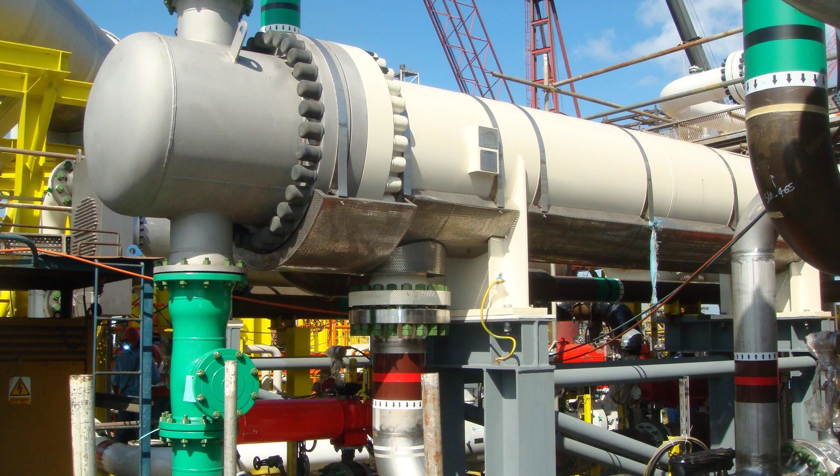This is not a dangerous job because things go wrong. It's dangerous because nothing is allowed to go wrong. Inside an active oil refinery, furnaces burn at 800 degrees, hydrocrackers operate at pressures that could split steel, and flammable vapor can reach ignition concentration in seconds. Every shift, every valve turn is governed by systems designed to prevent catastrophe. So what happens when those systems fail, even once?

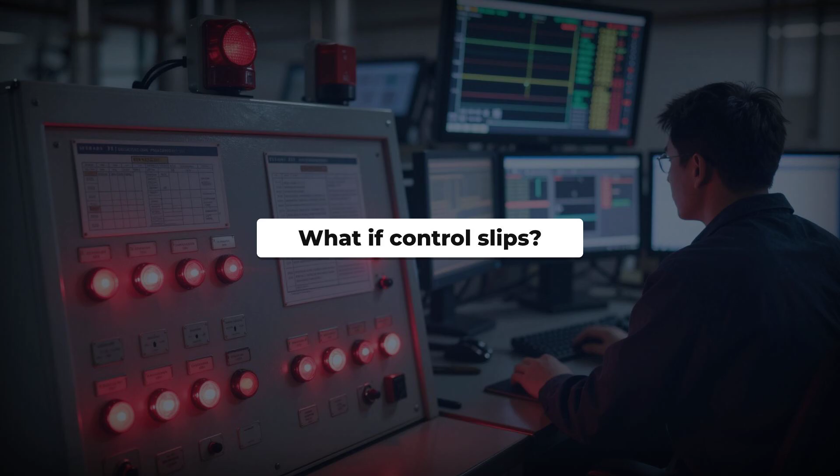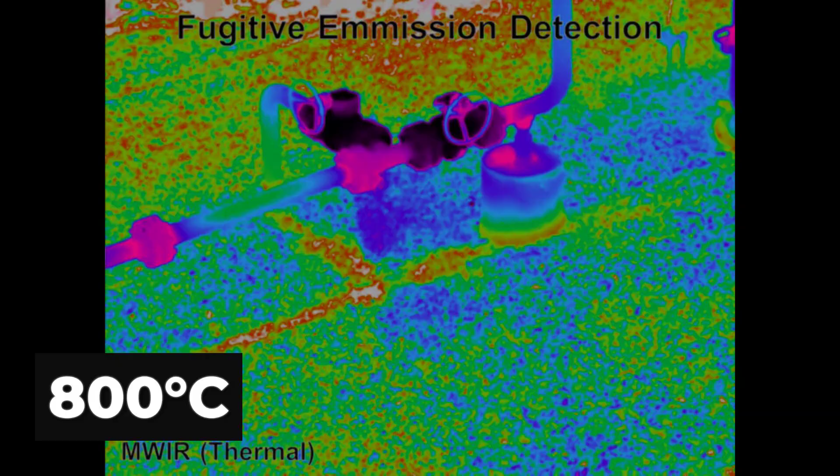Heat, pressure, and inventory define the physical reality inside an oil refinery. Fired heaters push process streams to temperatures between 400 and 800 degrees Celsius. In catalytic reformers, the steel shell glows faintly as hydrocarbon vapors circulate at over 500 degrees Celsius.

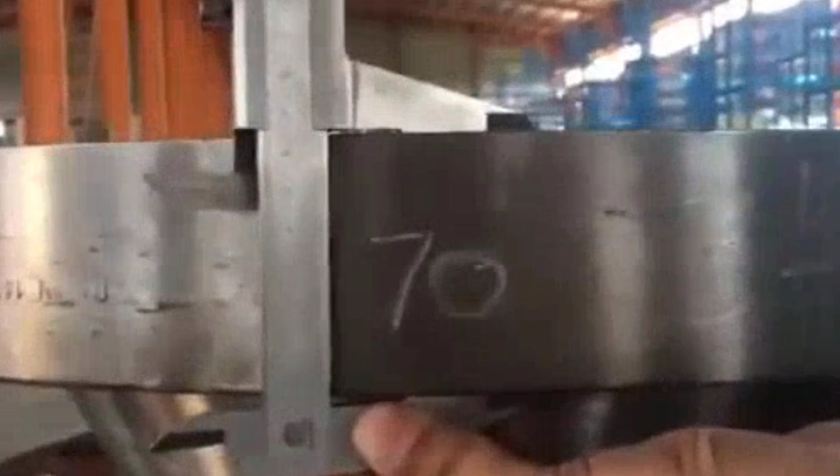Hydrocracker reactors run at up to 2,500 pounds per square inch, enough to rupture a vessel in milliseconds if containment fails. Every line, vessel, and flange holds a calculated volume of flammable hydrocarbons under these conditions. Even in so-called ambient zones, radiant heat keeps walkways at 60 to 80 degrees Celsius.

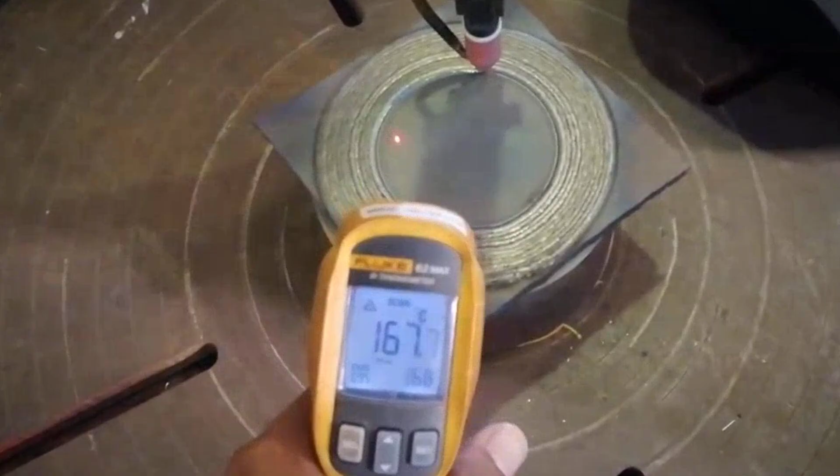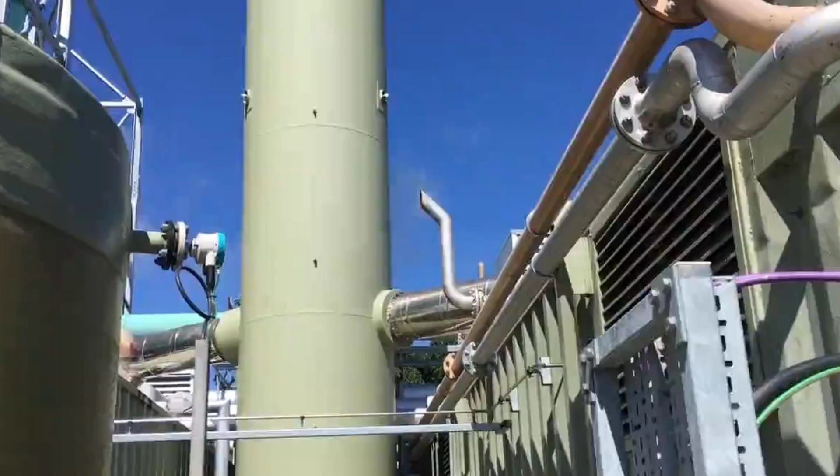The energy stored in these units is not theoretical. A single distillation tower can contain thousands of barrels of volatile product. Pressure surges, even brief ones, can force vapor through the smallest gasket flaw, forming an invisible cloud within seconds.

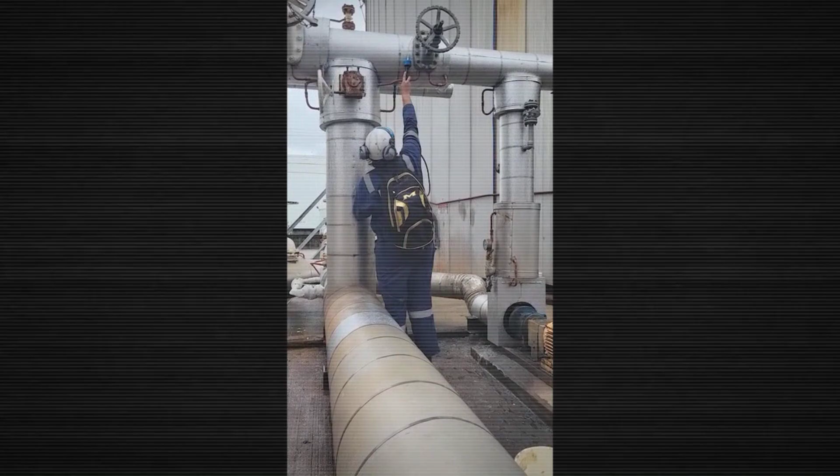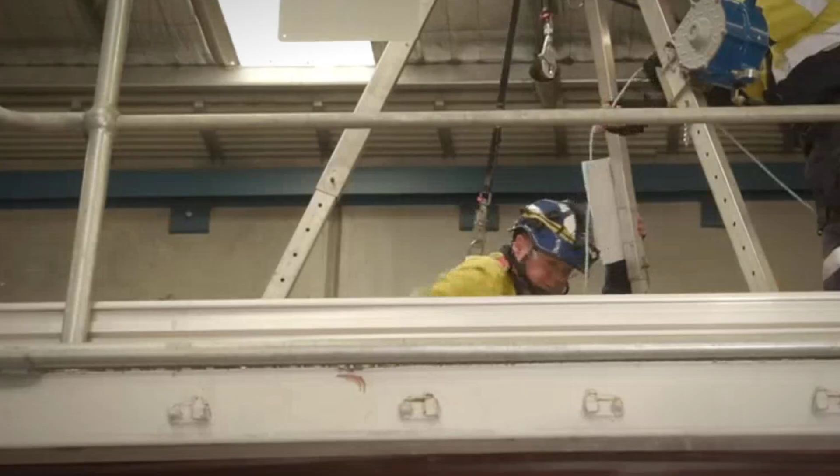In the overheads of a tower, vapor concentrations can reach ignition limits, methane at 5 to 15% by volume, propane at just over 2%. The density of these gases means they pool low, seeking out drains and trenches, and waiting for a spark. Continuous operation is not just a business decision, it is a safety strategy.

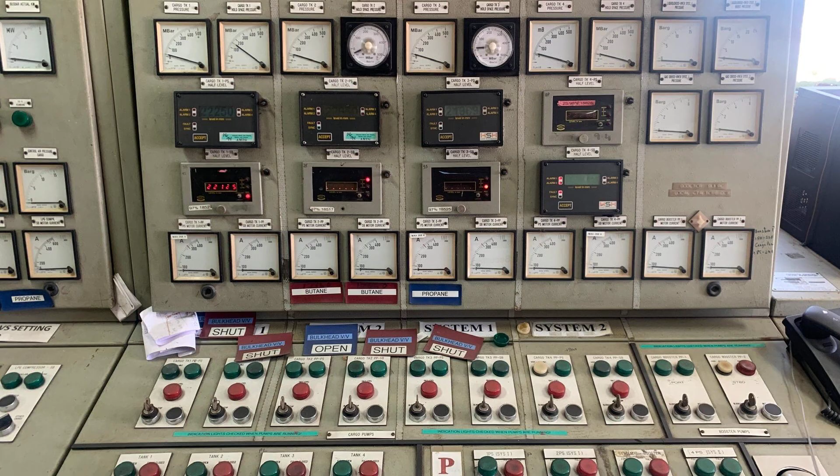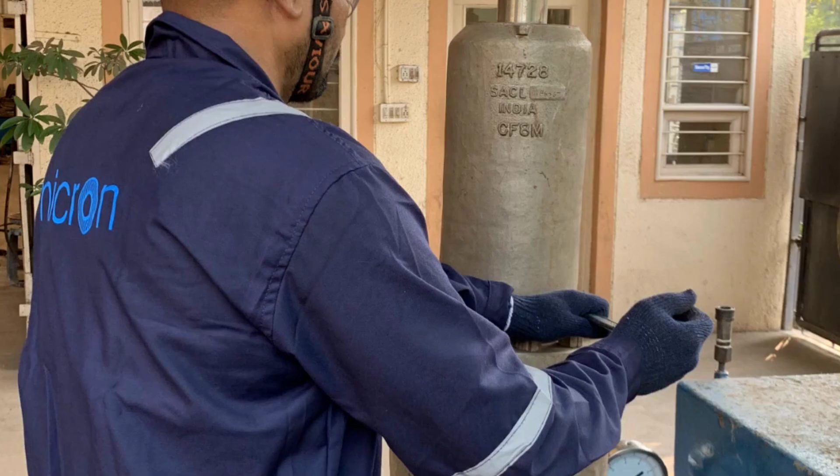Shutdowns and startups introduce unpredictable transients, temperature spikes, pressure fluctuations, and unstable flows. These are the moments when systems are most vulnerable, when a routine action can become the first step in a chain reaction. Every control, every barrier, is designed to keep the process steady. In this environment, a moment's deviation from steady state is not a minor error. It is a potential loss of control, with consequences measured in seconds and in lives.

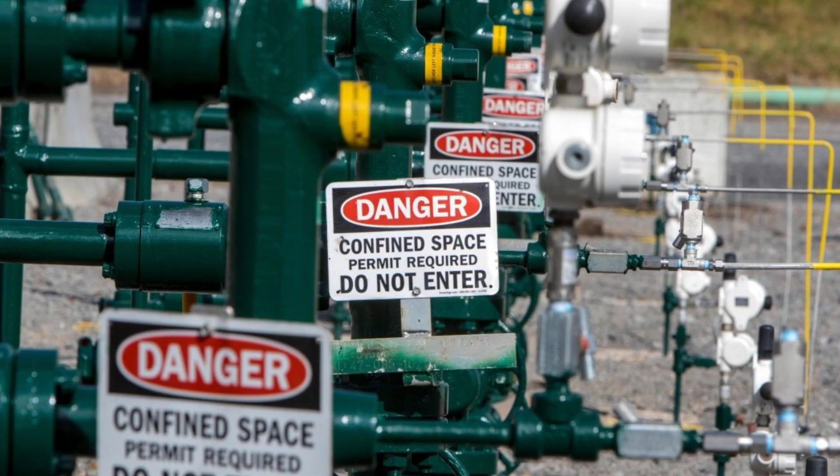Control inside an oil refinery is not left to chance. Every high-risk task, welding, valve isolation, confined space entry, begins with a permit to work. The superintendent reviews a digital dashboard showing open permits, each tagged to a specific unit, shift, and work team.

The process starts with a formal request. A supervisor details the job, location, and hazards. The permit system pulls live data from the maintenance scheduler and piping diagrams, flagging potential conflicts. No permit is issued until hazards are logged. Gas tests confirm safe levels, and every isolation point is marked on the digital piping and instrumentation diagram.

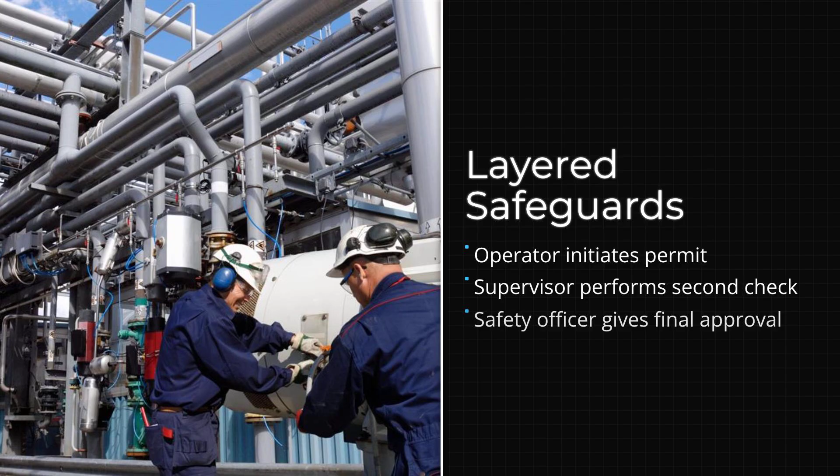Authorization moves in layers. The area operator signs first, then the shift supervisor, and finally, a safety officer. For hot work, gas detectors must read below 10% of the lower explosive limit. Only then does the system allow the work to proceed.

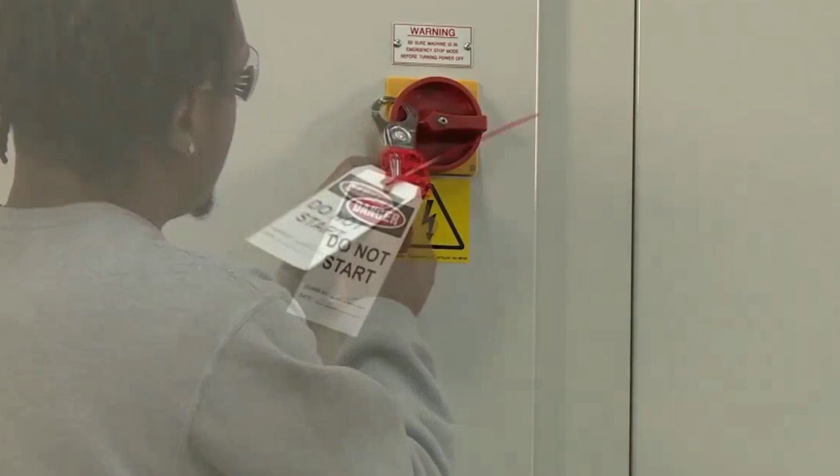Lockout and tagout devices are applied, red hasps, danger tags, and personal locks from each authorized worker. A third-party verifier checks every step, confirming energy sources are isolated and alarms are functional. No single person can bypass these controls.

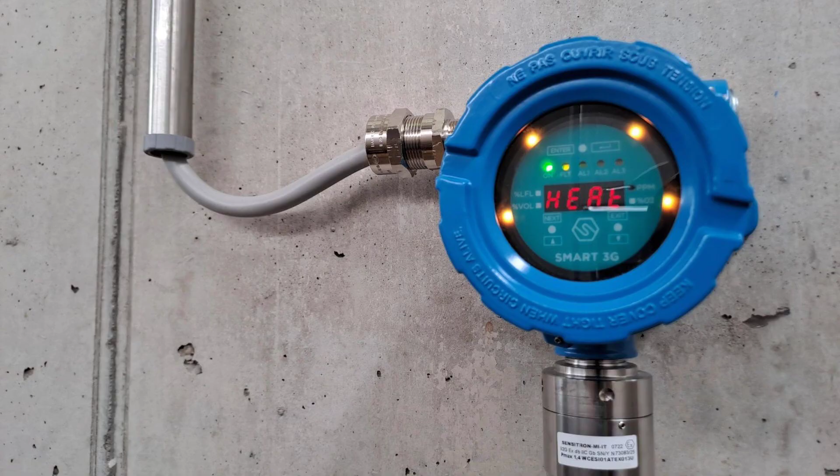Fixed gas detectors form a silent perimeter. Infrared sensors monitor for methane and propane, with alarm set points at 20 to 50% of the lower explosive limit. Signals flow to the control room, where logic solvers wait for a vote. 2 out of 3 detectors must agree before an emergency shutdown triggers. All actions are logged, time-stamped, and archived for audit.

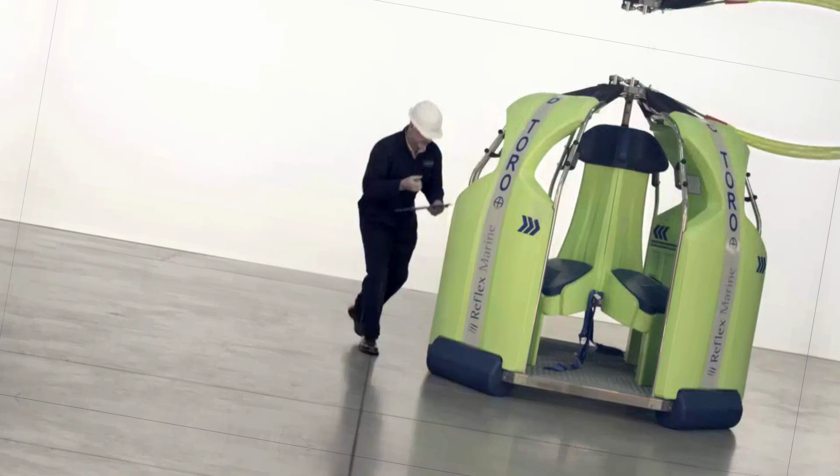The superintendent knows, in this environment, safety is built on traceability and redundancy, and strict adherence to procedure. The system does not forgive improvisation. It demands discipline at every level.

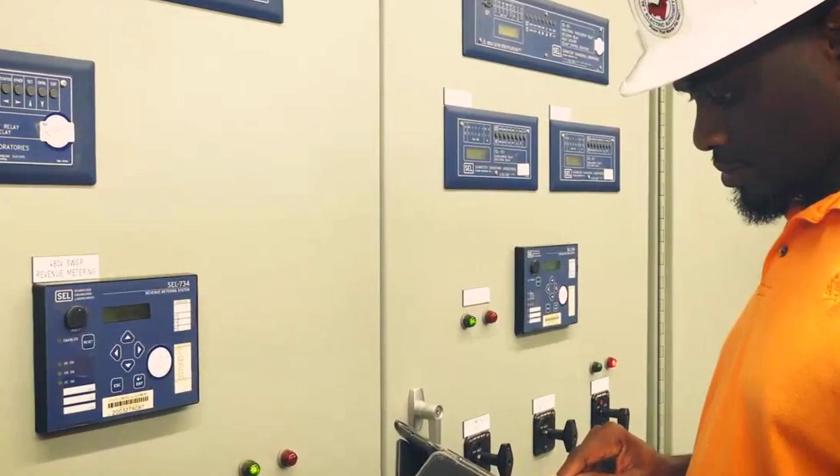A superintendent stands at the heart of the refinery's control structure, not as a lone decision-maker, but as the conductor of a tightly orchestrated process. Every action begins with a checklist, printed or digital, detailing the precise sequence for each task. Nothing is left to memory.

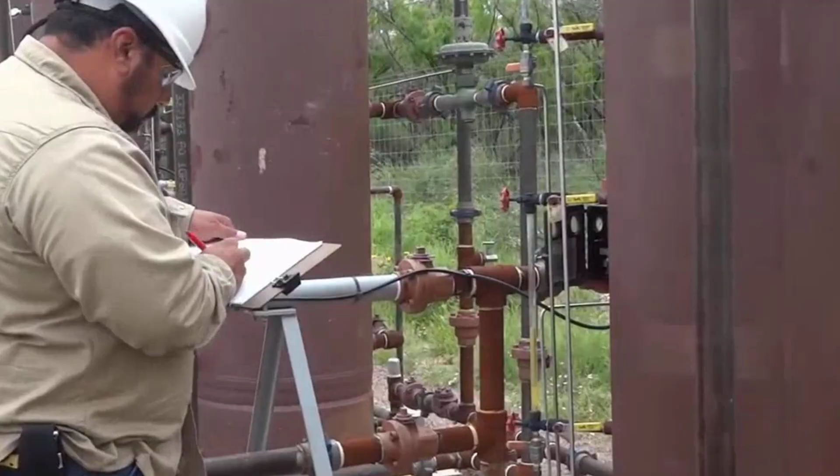Before a single valve is touched, the operator and a verifier walk the route together, cross-referencing each isolation point against the marked P&ID. The valve handle is tagged, locked, and double-checked. Only when both sign off does the process advance.

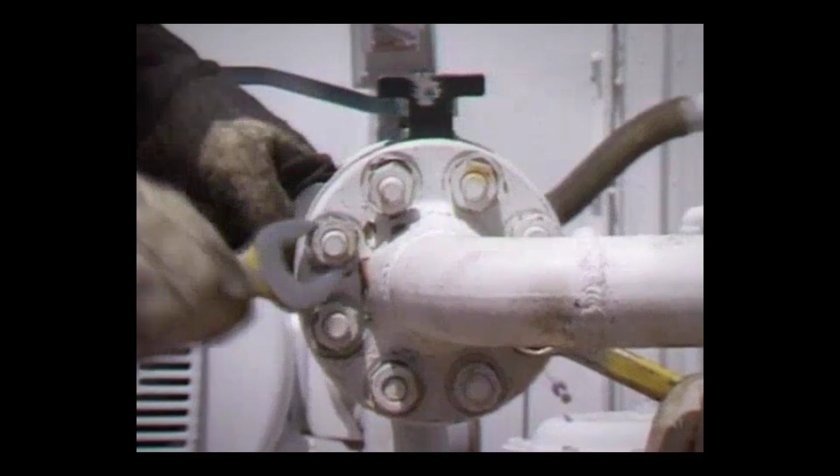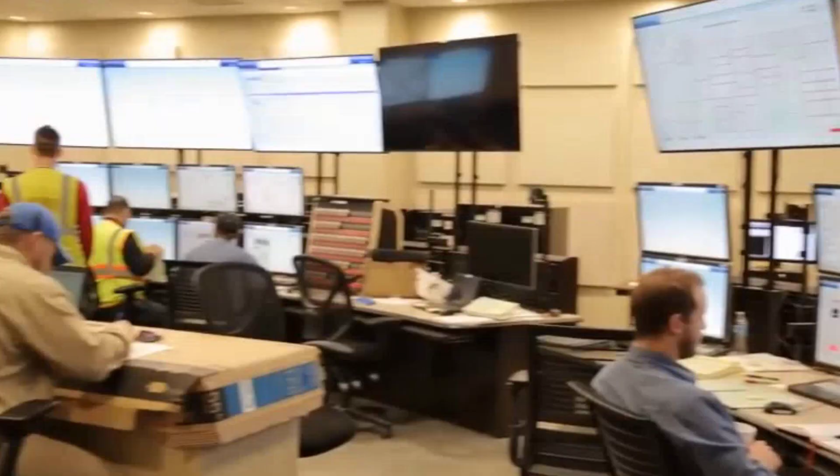Sidney Dekker calls this adaptive buffering. Humans act as the final shield against system drift. Operators do not improvise. They execute, verify, and document. If a step is unclear, the process stops. Questions are escalated, never bypassed.

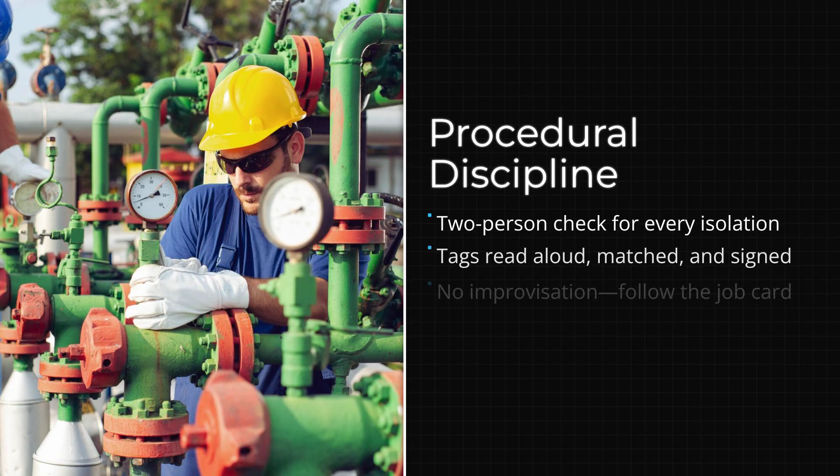Two-person verification is standard for critical isolations, with each worker reading aloud the tag number, confirming position, and logging the result. The superintendent observes not to intervene, but to ensure that the discipline of the process is respected.

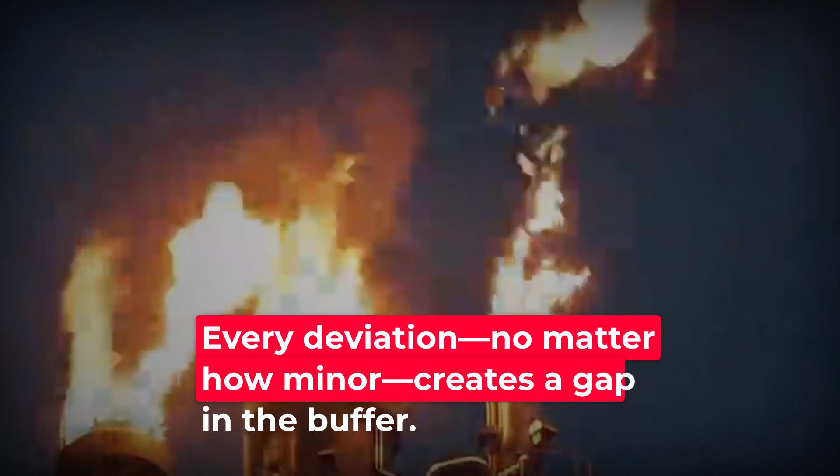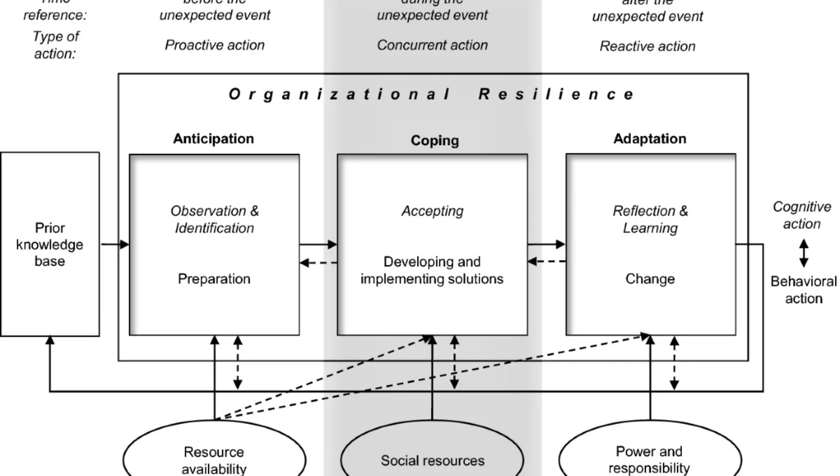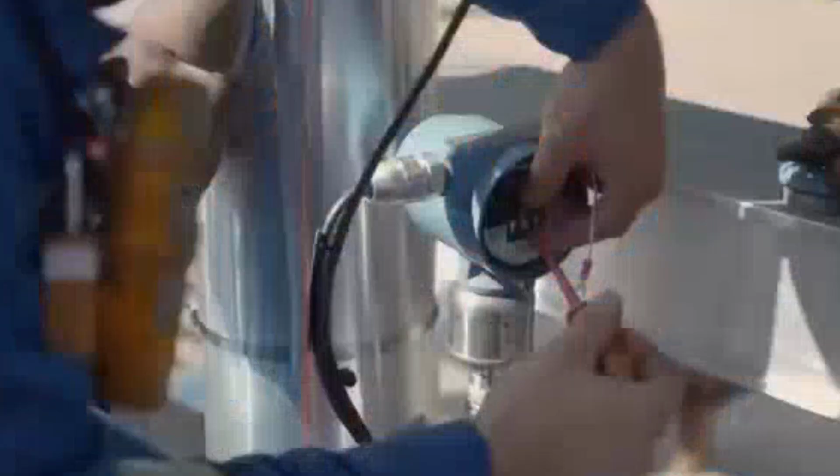In the refinery, discipline is not a suggestion. It is the only thing separating routine maintenance from catastrophe. The human layer is not there to innovate, but to absorb uncertainty through strict adherence. Precision is not a virtue, it is a requirement. The system expects it, and so does every worker who steps inside the fence.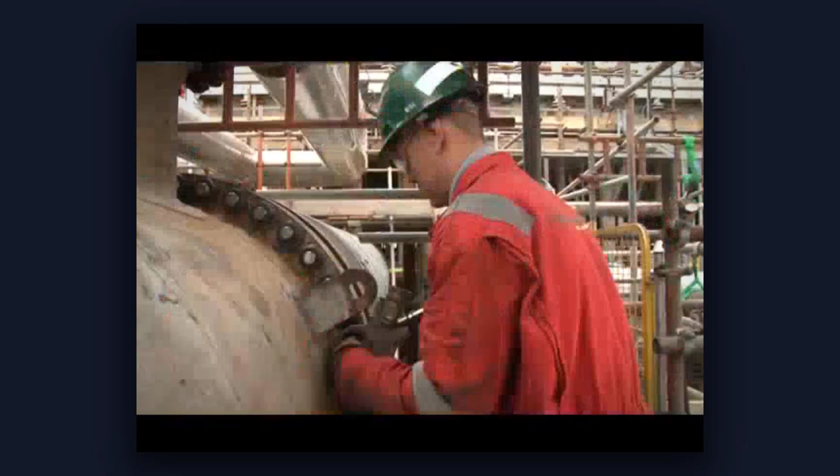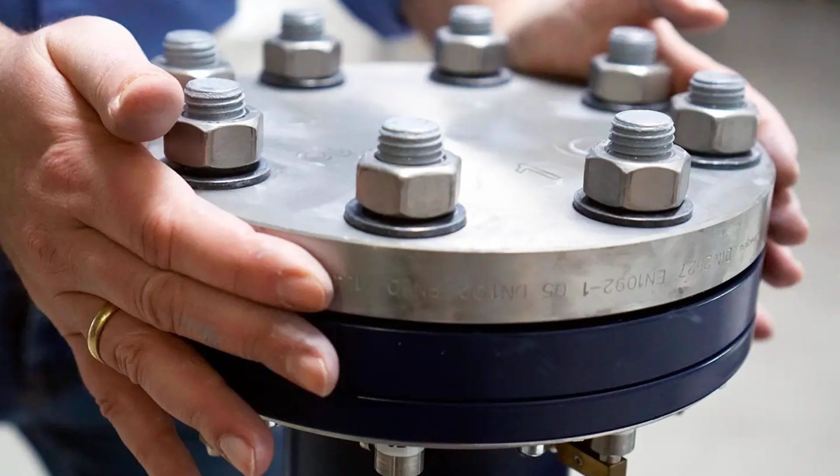A single lapse, a missed torque on a flange, or a misread gauge can set the failure chain in motion. Under pressure, hydrocarbons search for escape. A gasket, compressed thousands of times, develops a hairline gap. Through that gap, vapor jets into open space, expanding and cooling as it mixes with air.

The gas cloud forms in seconds, invisible and mobile. Its shape depends on wind, obstacles, and the density of the vapor. Methane and hydrogen rise, but heavier fractions like propane and butane hug the ground, pooling in trenches and around equipment. The cloud's concentration is not uniform.

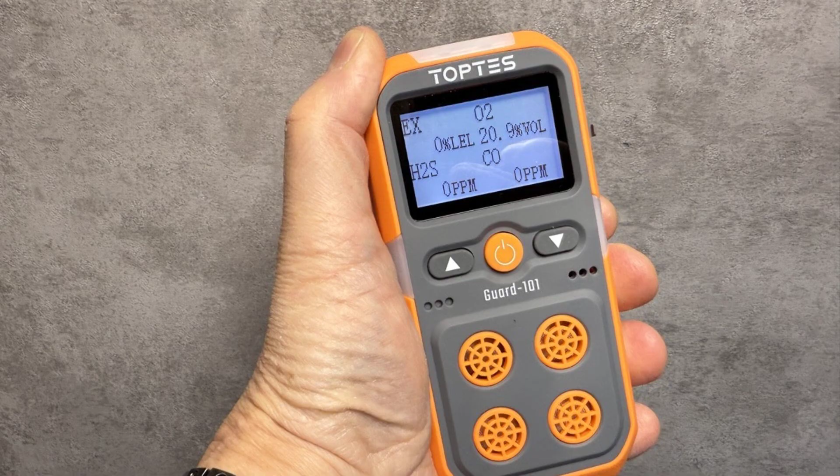Where it crosses the lower explosive limit, 5% by volume for methane and just over 2% for propane, it becomes ignitable. At this threshold, any spark is enough. A static discharge, a relay closing, even the heat from a running motor. Statistics show that in major incidents, clouds reach the lower explosive limit within 30 to 90 seconds of release.

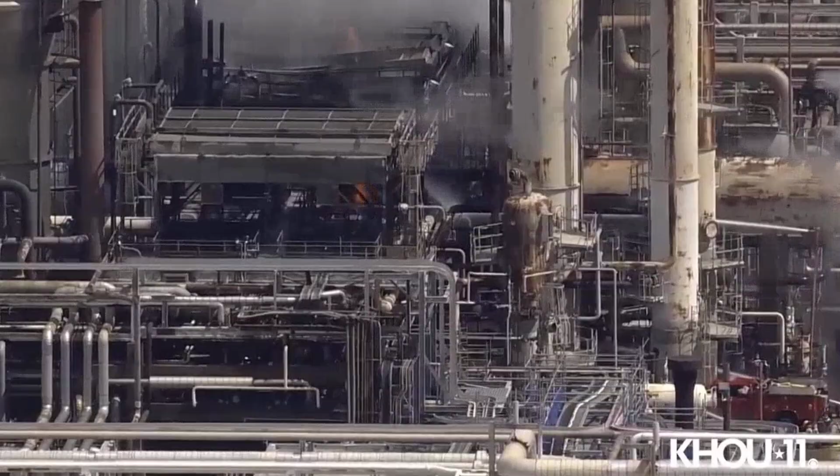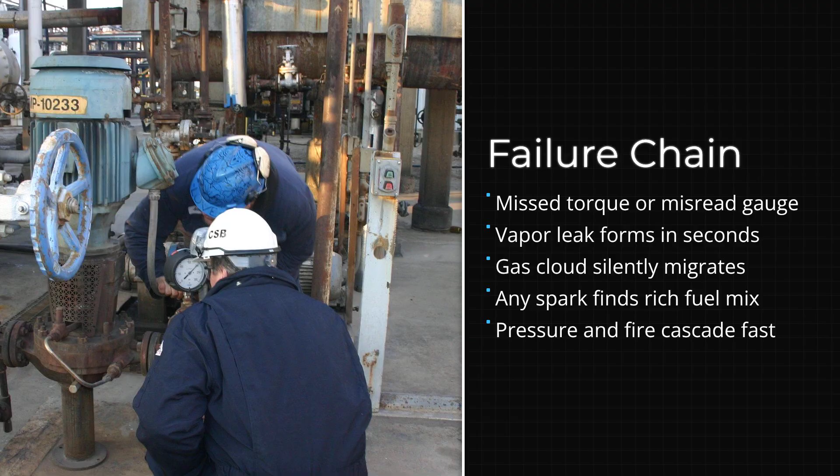Once ignited, the flame front moves with the fuel, accelerating through congested pipe racks, picking up speed as it consumes vapor. Pressure waves follow, shattering windows and rupturing vessels in their path. The initial leak, measured in millimeters, has become an expanding fireball. Each link in the chain, from leak formation through cloud migration to ignition, unfolds in a strict sequence, governed by the physics of pressure, flow, and combustion.

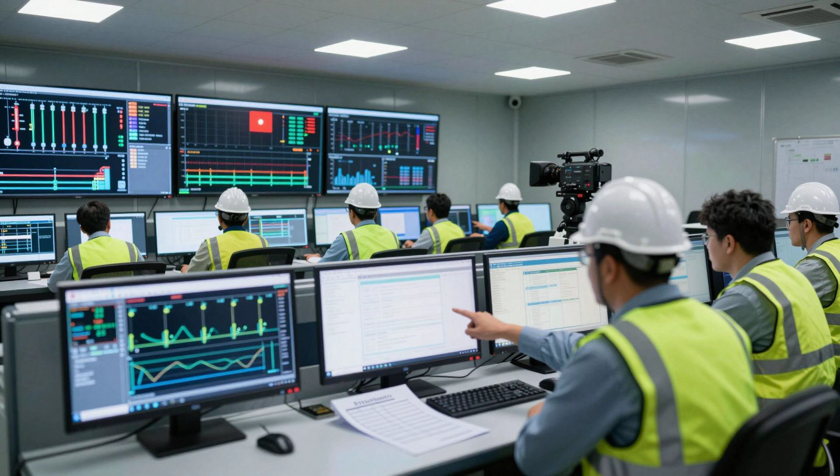There is no warning siren for the point of no return. The system relies on early detection, disciplined isolation, and rapid intervention to keep the chain of control from closing. When these controls fail, escalation is measured not in minutes, but in the time it takes for vapor to find a spark.

On March 23, 2005, a startup sequence at the BP Texas City Refinery failed in real time. A blowdown drum overfilled, sending a vapor cloud across the unit. Within minutes, the cloud ignited. 15 workers died. 180 were injured.

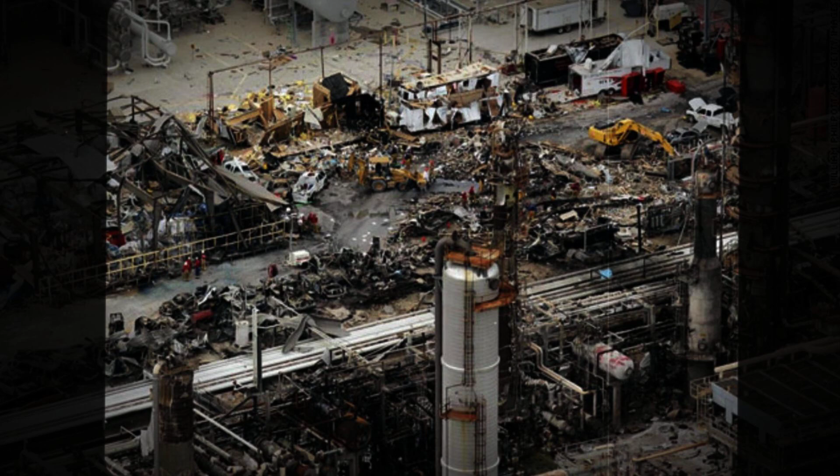The U.S. Chemical Safety Board's investigation traced the disaster to a breakdown in layered control: missing alarms, ignored procedures, and weakened oversight. Carolyn Merritt, CSB chair, stated that warning signs were present for years, but BP's focus on personal injury rates masked deeper process safety risks. The system depended on discipline at every level. When that discipline faltered, the consequences were immediate and irreversible.

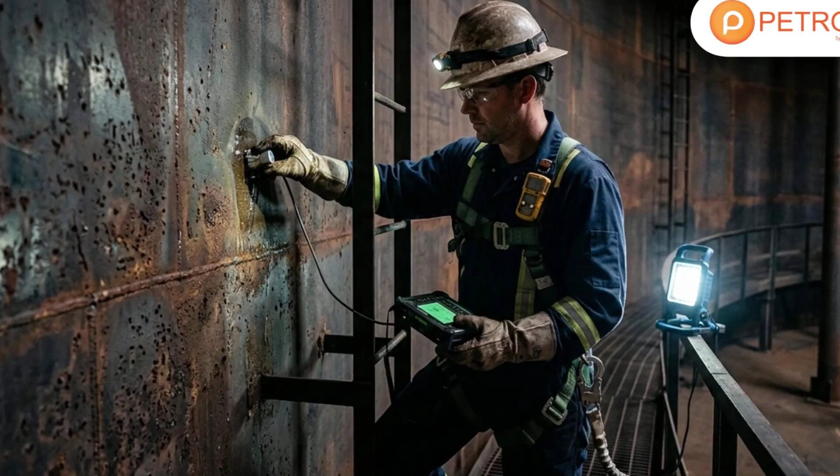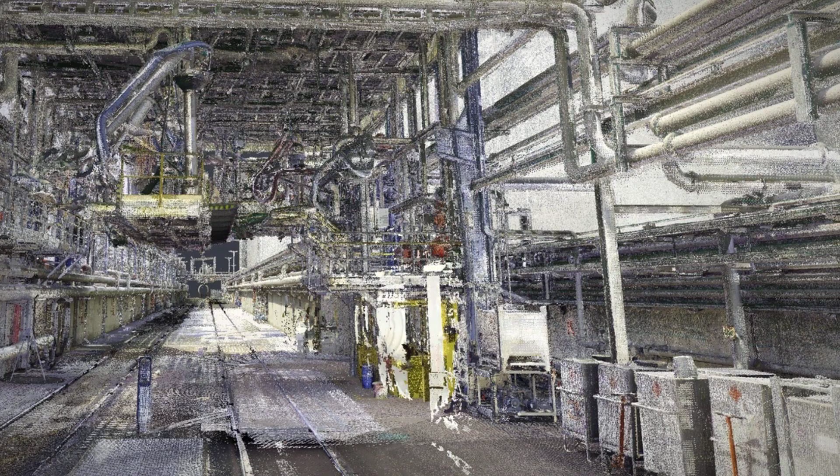Corrosion thins pipe walls. Fatigue cracks spread beneath insulation, undetected until a scheduled inspection. Every hour, metal degrades and gaskets age, but maintenance can only address what is found in time. Economic pressure is constant. Shutting down a major process unit can cost several million dollars per day in lost production. Operations weigh the risk of running equipment longer against the cost of interruption. Deferred maintenance accumulates as invisible risk, while the drive to keep units online never stops.

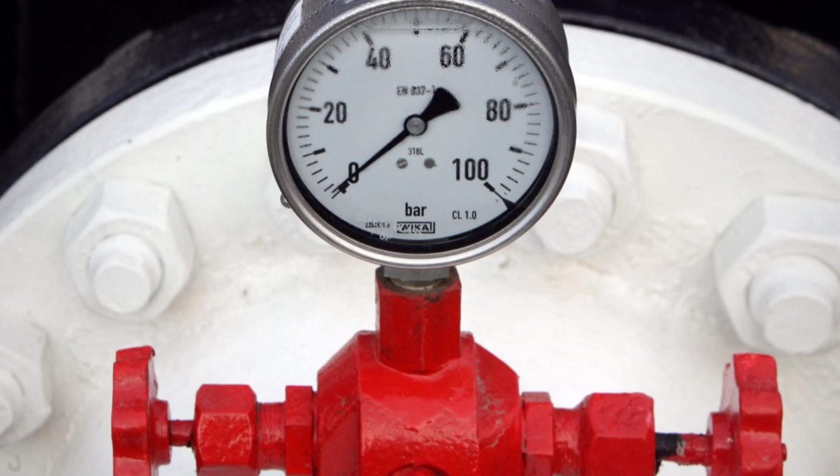Vigilance is not a campaign, but a permanent condition. Every system holds until it doesn't. In refineries, risk is not eliminated. It is managed, measured, and contained, hour by hour. The margin for error remains razor thin. As demand persists, control is the only constant. The outcome always depends on the discipline of the process, never on chance.